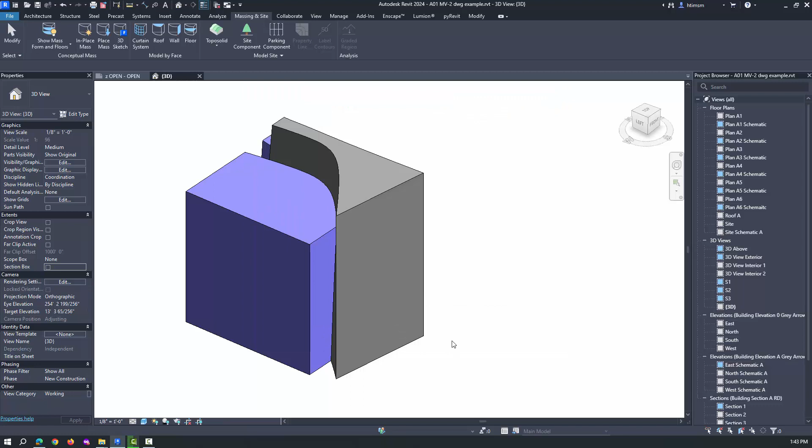If you're using a Rhino file that's been linked into Revit in the model, component and mass, you can also put adaptive components on. I'm just going to manage links and get rid of 1A for right now, so I'm just going to work with this guy.

If you want to do a divided surface and put an adaptive component on this, you would take this and go to edit in place. Basically it's similar to editing the family, and then you would come in and pick the surface.

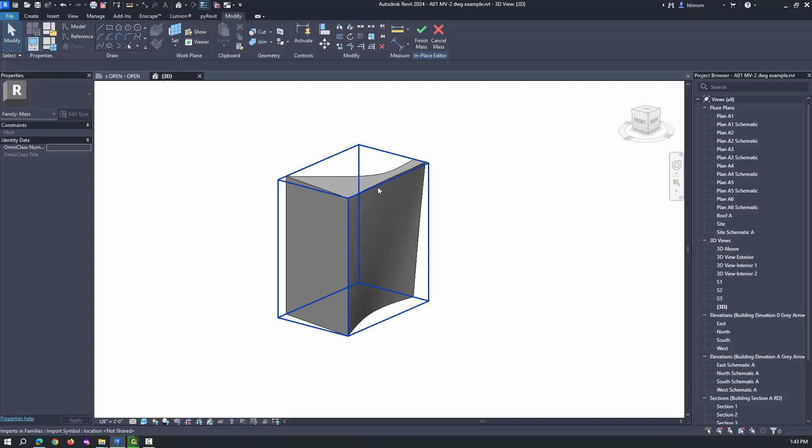Let's go ahead and grab this surface. I'll tab select in until I get that surface, and then I can divide that surface. You can see that it's dividing it, but it divides these a little different, like you see how it's kind of clipping it, so you might have some different issues with this.

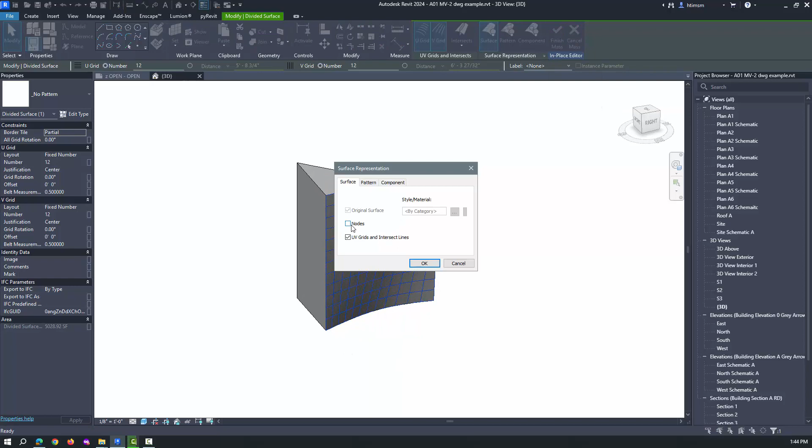Once you do that, you can go to the surface representation and turn the nodes on, and you get the same kind of options. Now if I go to insert and load family, I'll just grab these guys.

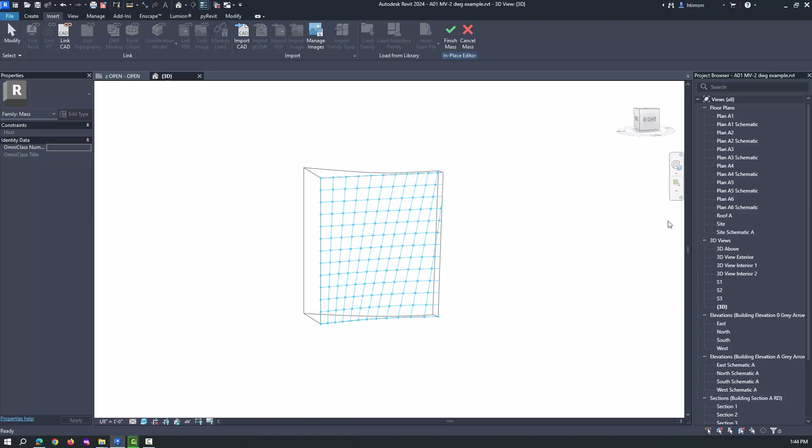It's going to load them in, and you really do need to use your project browser to get to them. I'm going to close up my views for right now, expand my families, close up my annotation symbols, and go down to my generic models, and that's where they're going to come in.

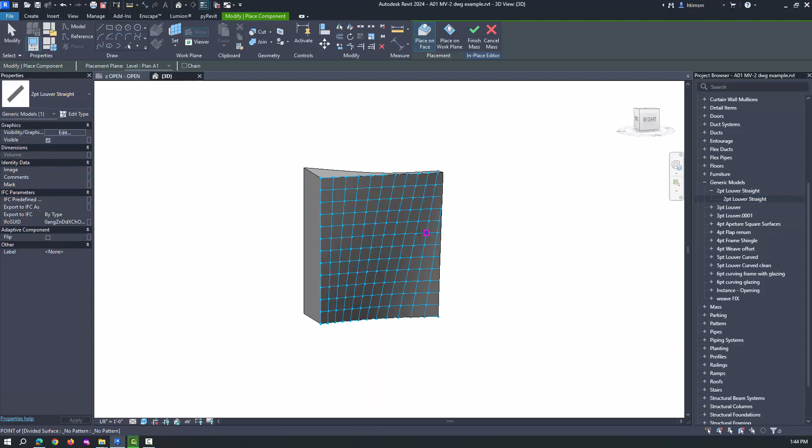If I come in and grab this 2-point louver straight and go 1, 2, there it is, and I can pick that. Let me edit type it, and let's see what it looks like at 0 degrees.

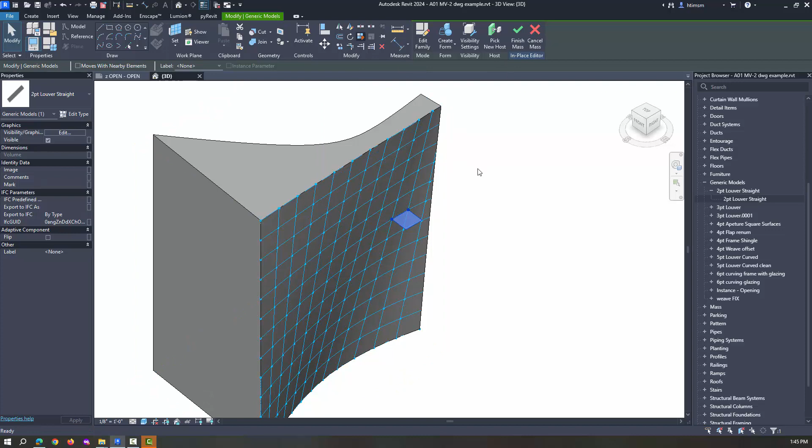0, so maybe at 90 degrees. If it's at 90 degrees, then I can repeat that, and now I've got louvers going across there. You're going to get breaks in it when it clips a node off, and that's really kind of all.

There's not much you can do about that. You just have to work with it.

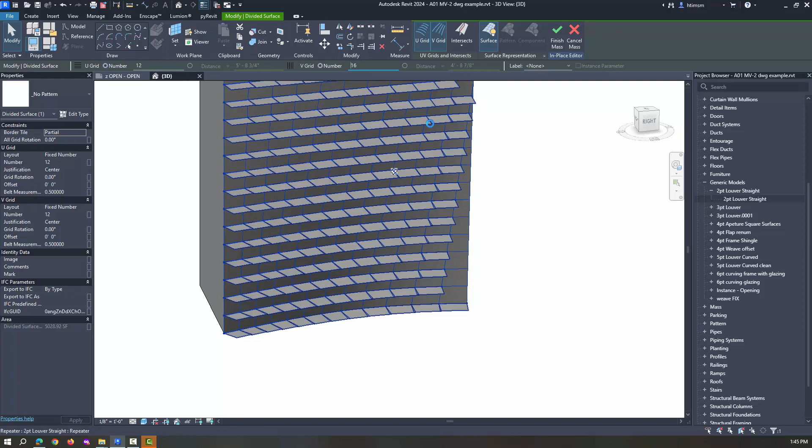I could also come in at this point and change the divisions. So if I wanted this to be 6 - oops, not 16, oh now it's going to do 16 - but maybe this is just 6. If you wanted to get these kind of closer, you could actually come in and divide that more often, like if I did 24 here, you'd get halfway closer.

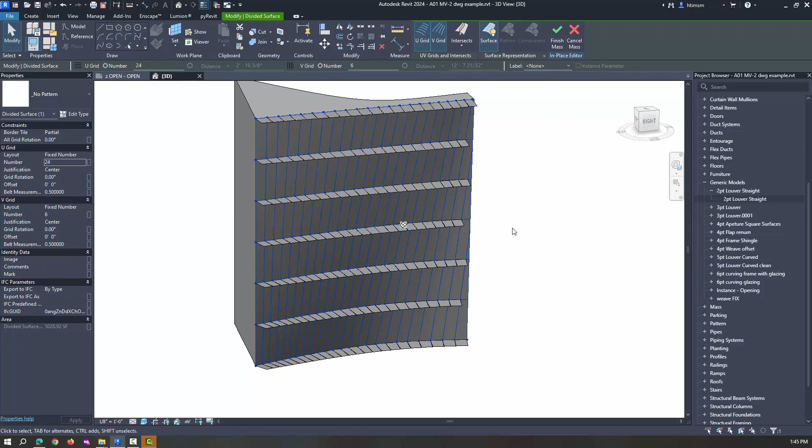But that's always kind of a pain, so you can go in and do that. The other things that you can do, so if I delete this guy, just sort of play around with them.

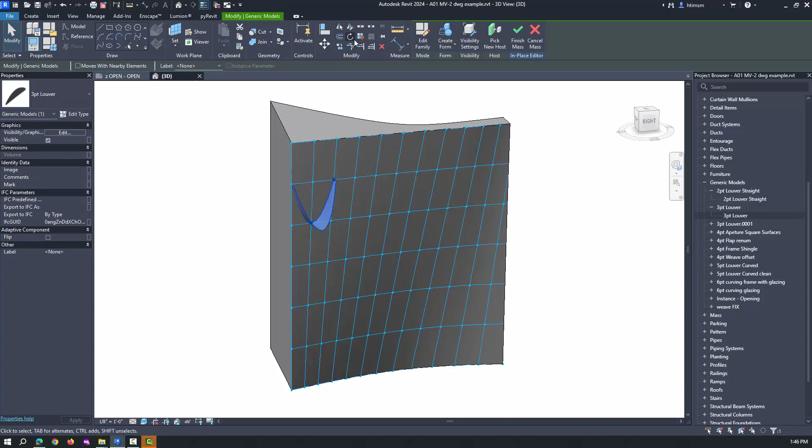There's this 3-point louver in here, and if I drag it out, just like I did in the previous one, you can kind of repeat that, and you can do multiples at once. So the 3 is going to skip the 2.

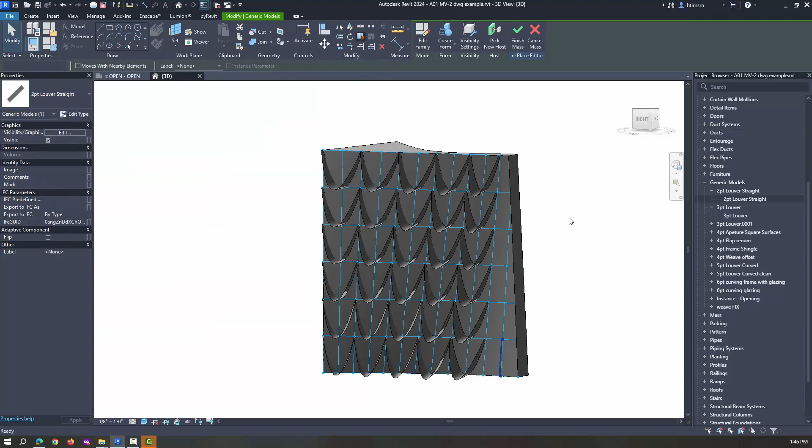Maybe I'm going to come in and drag the 2-point louver in, and I want some kind of verticals going through here as well. So I'll pick that guy and edit type, and let's pull it down to like 1 foot. Then I'll repeat that, so now I've kind of got that guy rolling along with that.

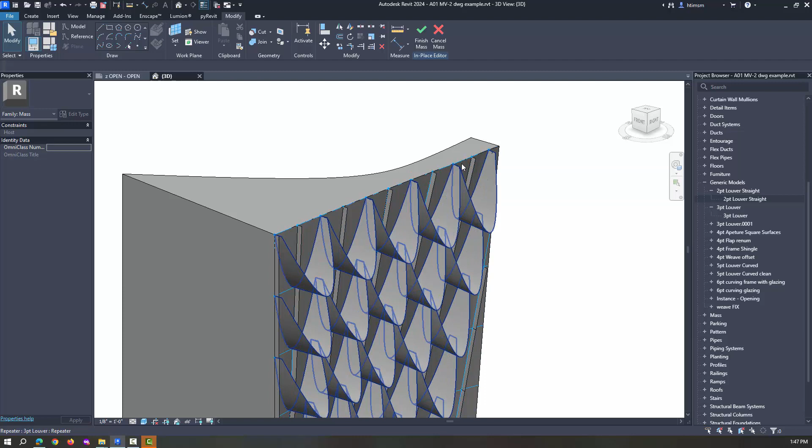I think the issue that you're going to have is that it's not actually getting rid of the face. Let me see, let's get rid of the surface.

It looks like, unfortunately, you might have to turn off the masses altogether to get it to work, unlike the conceptual mass. But it will put it on the face of that.

It's possible that you could come in, and I don't think modify - yeah, it won't let me. How about if I - will it let me paint? Let me go to glazing. The face, I didn't think it would.

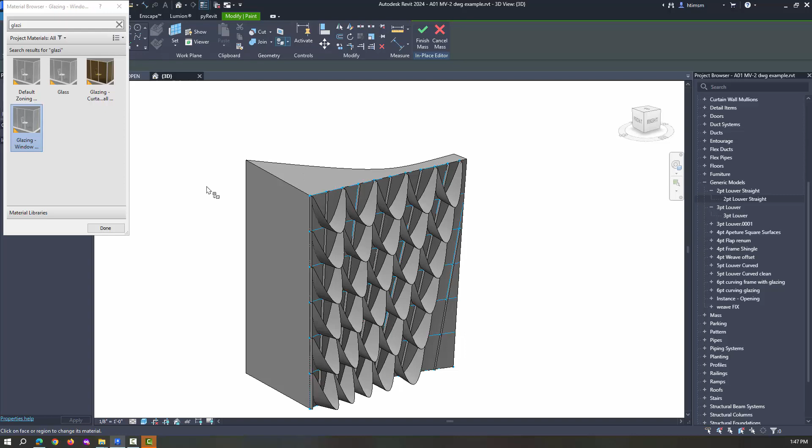So there is some limitations, but you can kind of play around with this guy. And then if I come in and now I'm in here, shaded, yeah, now you do have that on the side of it, but if I go to my visibility graphics, the mass is off.

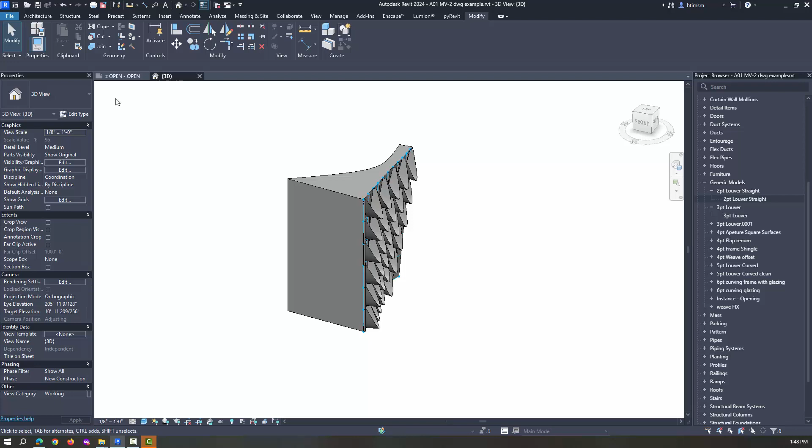Let's see, the masses are off. Let's go to Massing & Site, show mass by view settings. So unfortunately, it doesn't make the surface disappear.

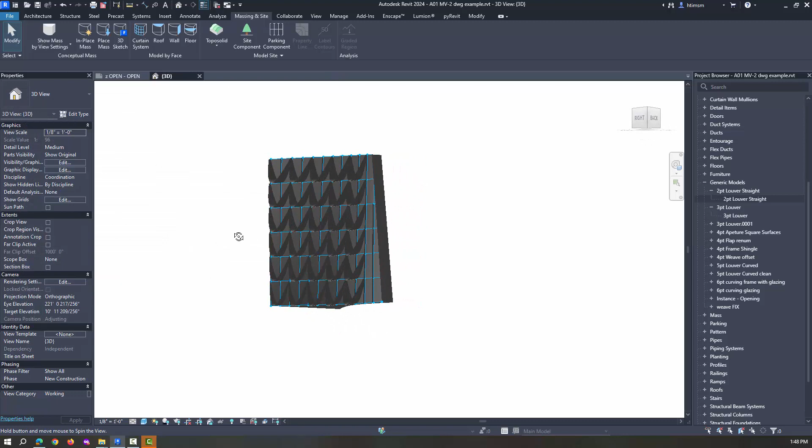So if I come in and turn my masses on, it's just going to show everything. It's going to show the background face, so it doesn't get rid of that face. So you would have to come in and do this and hide the masses. So it's a little bit more difficult with the Rhino model.